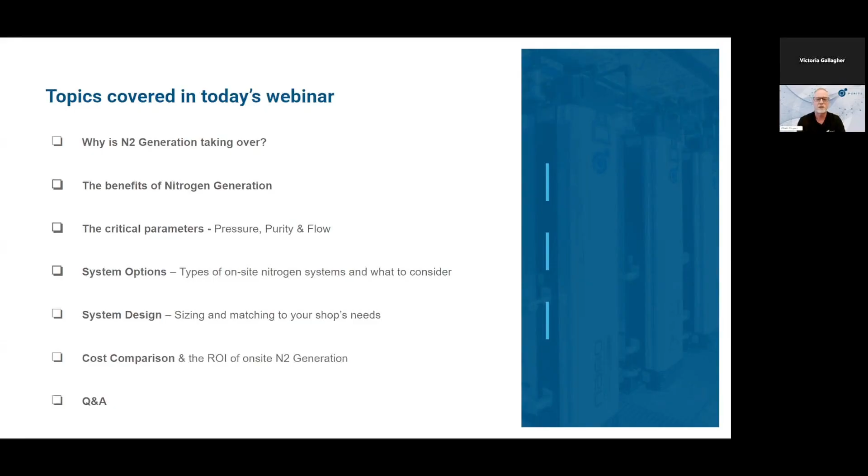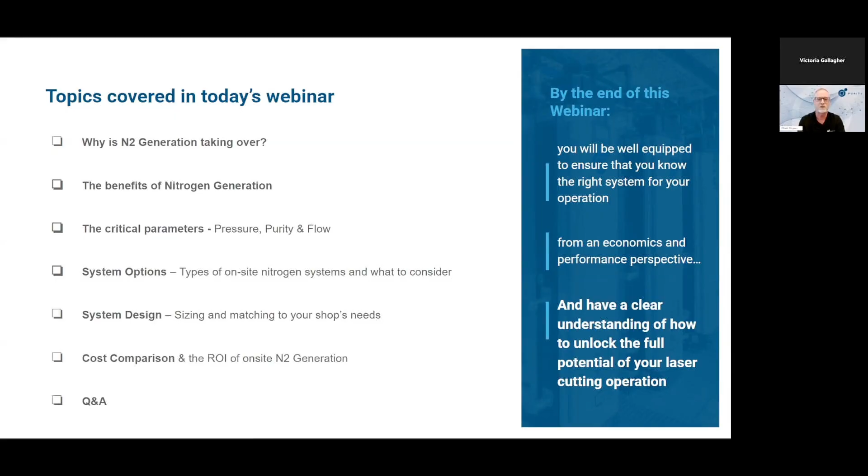And as Victoria mentioned, at the end there's going to be an opportunity for some Q&A. By the end of this webinar, you're going to be well equipped to ensure you know the right system for your operation, both from an economic and a performance perspective, and have that clear understanding of how to unlock the full potential of your operation with this technology.

Now, a couple quick points about Purity Gas, who we are, what makes us qualified to present this information in this webinar. First, our origin. Nitrogen generation serves the purpose of allowing users to reliably and safely produce their own nitrogen. Most importantly, it provides users with a far more affordable option than the typical delivered nitrogen options. Purity Gas was born as a result of seeing the nitrogen generation market being underserved, primarily by dealers and definitely not by experts. The market needed leadership in this regard, and hence Purity Gas was born.

The entire team here are nitrogen generation experts across all departments. And a little internal motto that we live by here is: nitrogen generation is all we do, so we better be the best at it.

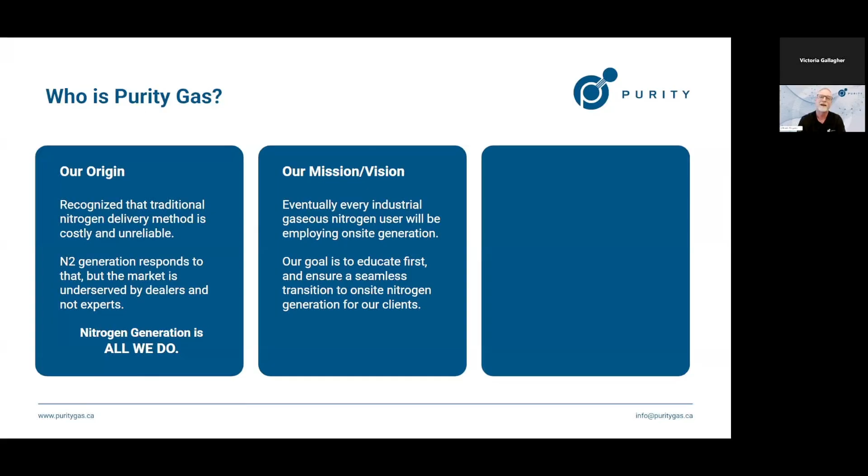Now, talking about our mission and our vision as a company, there is an expectation that eventually every industrial gaseous nitrogen user is going to be using on-site nitrogen generation technology. Our goal is to educate first and ensure a seamless transition for anyone looking to benefit from the technology, and hopefully you learn enough from us that you choose us as your partner.

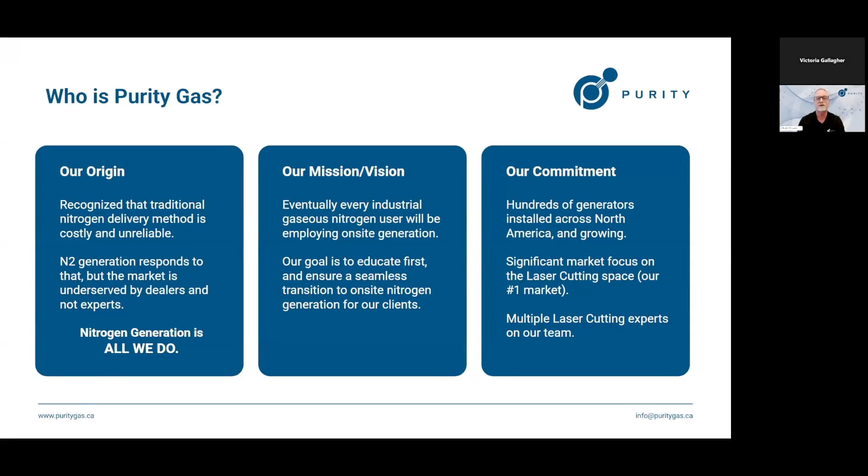Now, our demonstrated commitment to this industry: we have hundreds of nitrogen generators installed across North America, and that number obviously is constantly and very quickly growing. We have a pretty significant market focus on the laser cutting space. We've got several laser cutting experts on our team focused on this vertical, both from a customer experience perspective as well as R&D and engineering.

So the shift is underway, and the eventual shift is inevitable. We're going to look at why this is happening, and we've got three portions of the equation. The first, the changes we're seeing in the traditional delivery method of nitrogen: the cost is increasing, it's getting more expensive every year. The degree of reliability is decreasing, increasingly unreliable. And we're also seeing these contract lengths really start to expand to 5, 7, even 10-year lengths.

So we've got the one side with the traditional delivery, and benefits or improvements to on-site nitrogen generation, both in its availability, the efficiency, and the affordability of these. So more and more of this is coming available, and it's more viable in different and more operations.

Factor in now your specific business and the changes in metal fabrication. Everybody's running fiber lasers now. You've got more materials that are using nitrogen, and using more of it. You've got 12, 24, 30, I think there's even 60 kilowatt lasers out there now, and the nitrogen usage is obviously increasing as a result. All of that leading to that shift into on-site nitrogen generation, as I mentioned.

Now, when we talk about the benefits of on-site nitrogen generation, we break them into four pillars of value: expense reduction, operational improvements, environmental impact, and occupational health and safety.

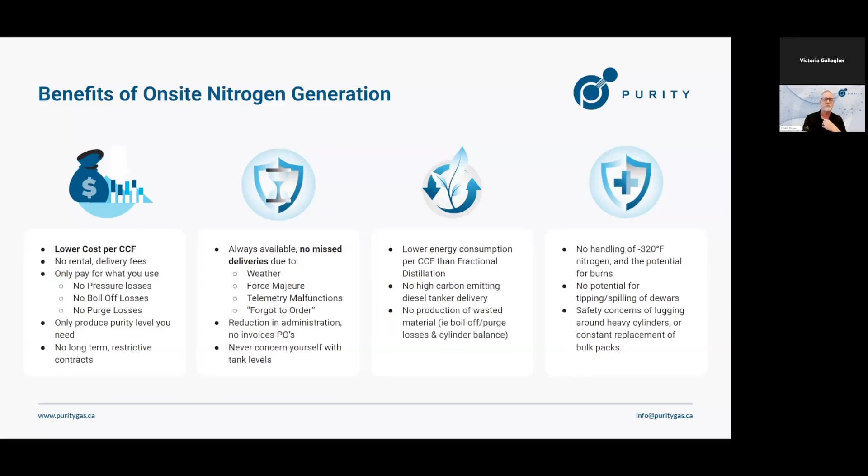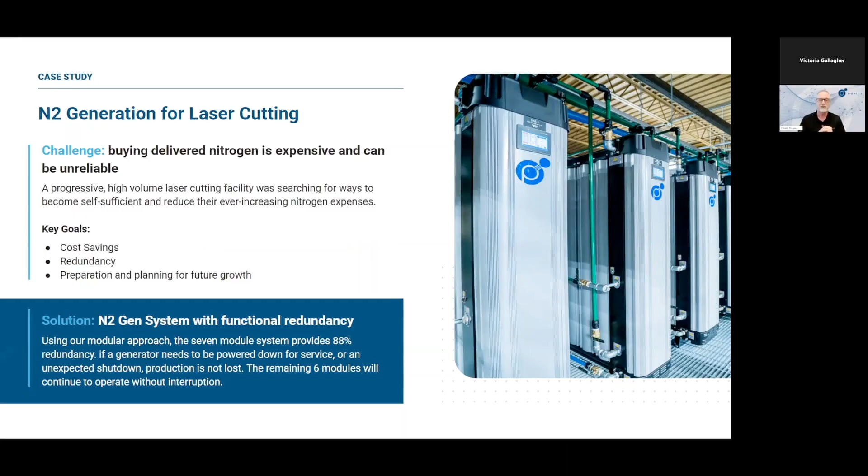Now, as far as some case studies, I wanted to share a couple from the two ends of the spectrum for laser cutting operations. This particular company was a large operator, still is, and they ended up getting a multi-bank system of 7 of our largest generators. They did that entire transition from liquid nitrogen and saved 69% on their annual nitrogen spend, turned into a 3.4-year payback, and they saved about 20 tons of CO2 emissions.

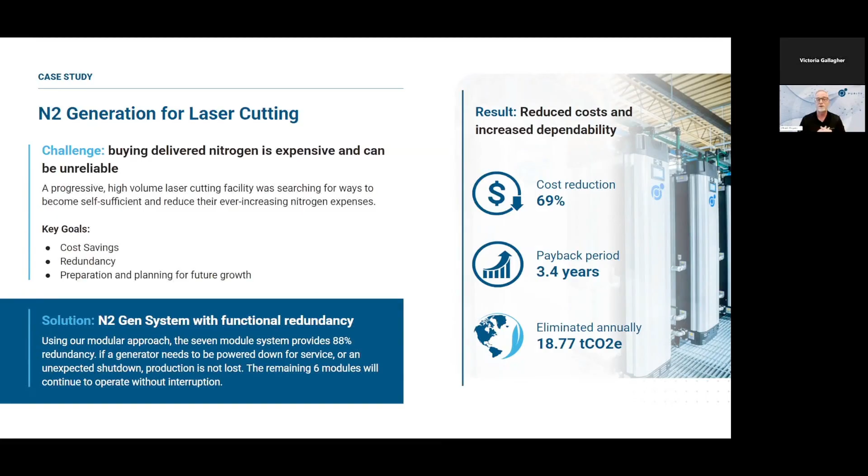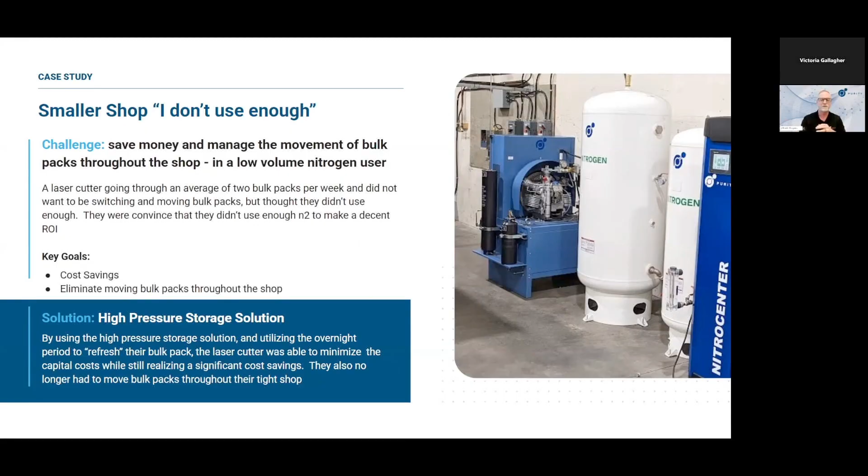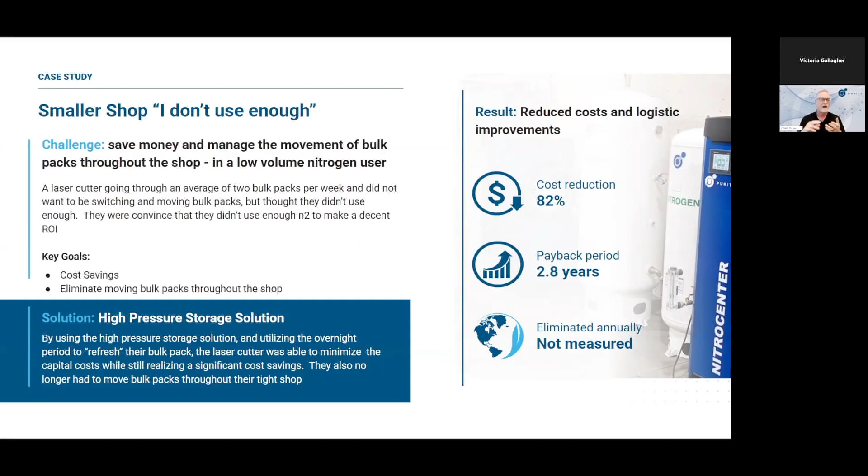On the other end of the spectrum, this is a smaller laser shop who, when we first started talking to them, said, 'I don't use enough.' They were using a couple of bulk packs a week. Through our free assessment process, we determined that with the cost they were spending on those 2 bulk packs, they were actually able to pay back a system in 2.8 years. So they recognized the savings, but also became a lot more efficient by not having to swap out bulk packs, manage deliveries, or move bulk packs through the shop.

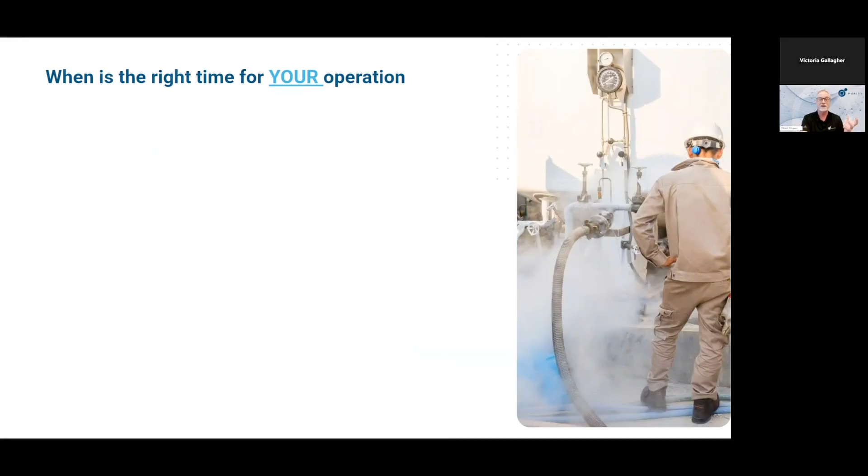So the question that's often asked is: when's the right time to actually make that switch? We can identify several of those. First, when you run out of nitrogen, you miss deliveries, or you're put on allocation or force majeure.

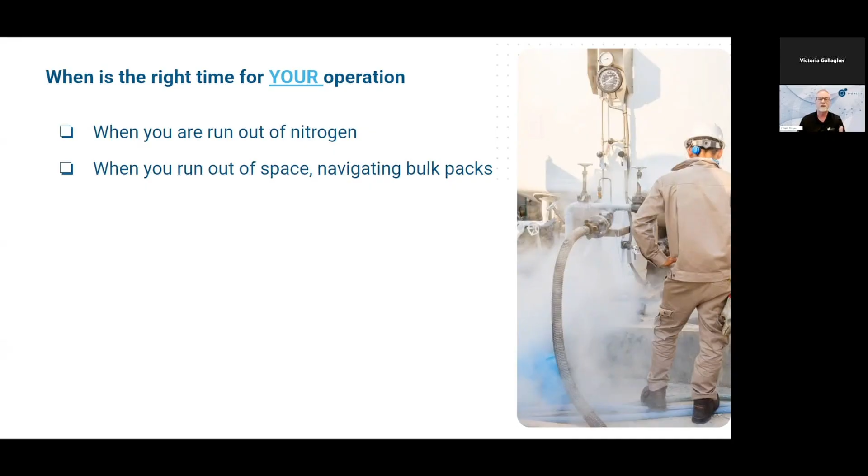Lasers are incredibly expensive, and therefore they have a very expensive downtime cost, charging out hundreds of dollars per hour. Not very beneficial to not be able to run your laser because your assist gas isn't available. When you run out of space, maybe you've got too many bulk packs on the floor. Keeping several on hand at any given time is valuable real estate and can also pose a health and safety issue.

When and if you want to positively impact the environment, as I mentioned before, increase the sustainability by way of eliminating the high CO2 emitting diesel tankers from that delivery process.

When your contract is up, or before you sign a contract, the ROI and payback are almost always shorter than the contract lengths being offered. We're seeing 5, 7, and 10+ year contracts becoming the norm. What's interesting is when we look at paybacks of 2.8 or 3 years, the strategy many of my customers employ is: as long as it's shorter than the contract length I have to sign up for, that's a good perspective.

When you use enough - well, how much is enough? Our customers have made great use of nitrogen generation systems with incredible paybacks, using as little as a bulk pack every couple of weeks. And of course, it scales - the more you use, the more you save.

When you realize you're spending more than you should or could be - you're all experiencing regular price increases in spite of contracts even, some often upwards of 10% over a single year. With on-site nitrogen generation, we're typically seeing between about a 70 and 90% reduction in nitrogen costs.

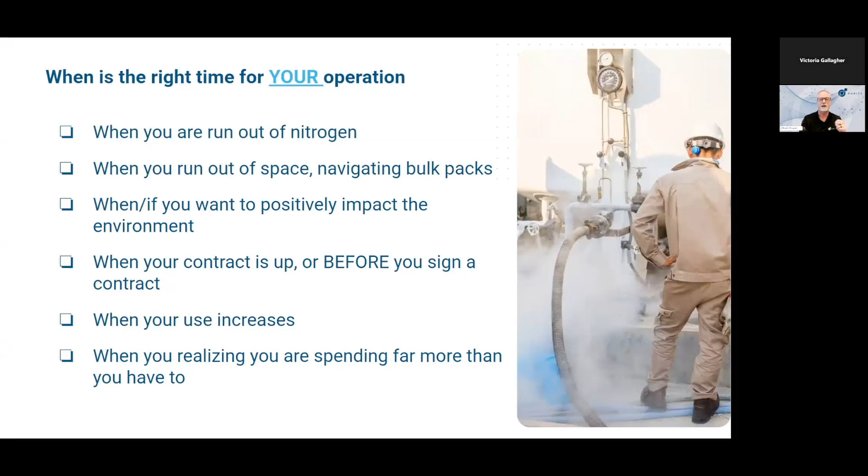So if you don't clearly understand your needs, you run one of two risks: speccing a system that's oversized, costing you more than it needs to from an initial cost, space, and efficiency perspective, or conversely, a system that's undersized, resulting in not having enough nitrogen to satisfy what you need for your operation. So what are the requirements specific to the operation?

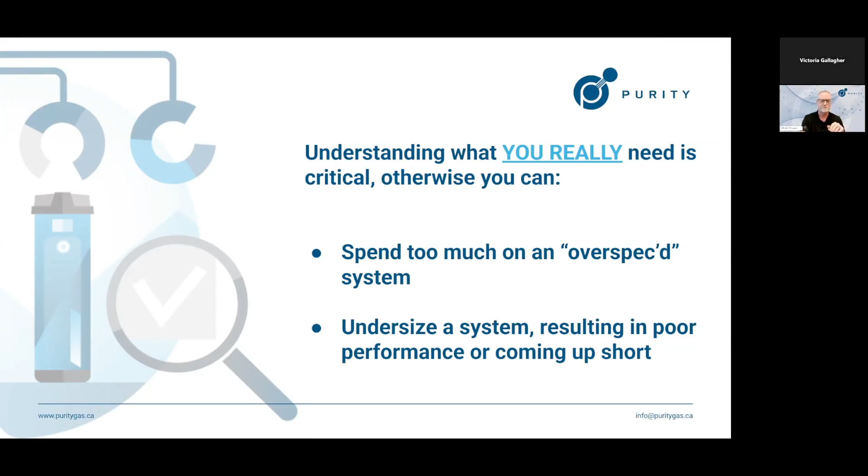We have several, but we're going to start with the big three. There are three main parameters when we're sizing a system. We talked about those, or highlighted what they were, but let's go into a little bit more detail.

First, it's pressure - more specifically, what the nitrogen outlet pressure your laser specifically requires. This is typically set by the laser or the laser manufacturer. In laser cutting, we see between 250 and 450 psi as the norm. With nitrogen generation, you have an opportunity to optimize your system by understanding that intimately, so as not to oversize or overpressurize a system unnecessarily. That can allow for the use of smaller and less expensive components and less energy consumption as well.

Pressure is not a one-size-fits-all specification, although in many cases it's portrayed that way. Knowing what your actual pressure requirement is going to be beneficial to your operation.

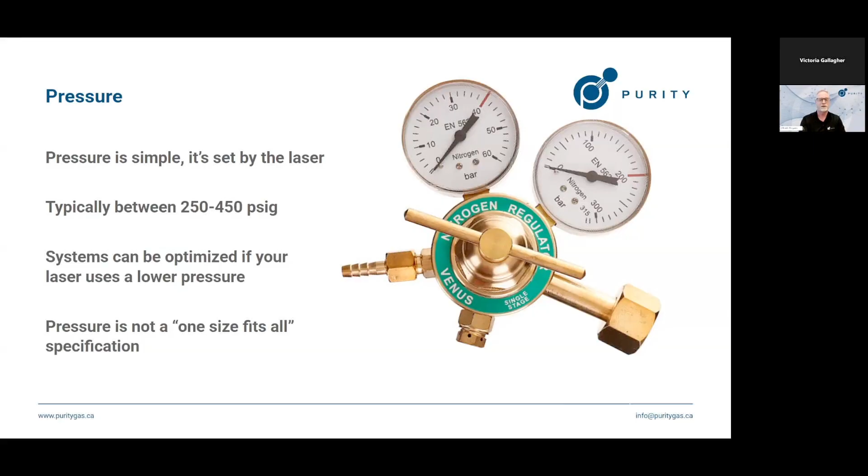Next is purity, and this is a source of quite a bit of confusion regularly. What purity means is actually the measure of allowable oxygen - it's not a measure of how clean the nitrogen is. Nitrogen generation is capable of producing nitrogen as clean, and in some cases cleaner, than bulk delivered nitrogen. As far as what your laser needs, oftentimes the laser manufacturer is going to spec that 5 nines, the 99.999% nitrogen. However, that spec's typically designed to, quote, cover their butts, and not necessarily a true reflection of what the needs are. As far as what the needs are, it's based on the materials you're cutting.

The market has experienced success with these established purities: minimum 95% for cutting aluminum, 99.5% for mild steel, and stainless, the most prone to oxidation, is 99.95%. Now, nitrogen generation is more than capable of producing the 5 nines, and we do it for other industries and verticals. However, it results in a larger than necessary, and subsequently more costly, system - both from a capital and operational cost perspective. So, concluding that, understanding the correct purity that's going to produce suitable cuts is critical, so that you can challenge the spec and know what your true requirements are.

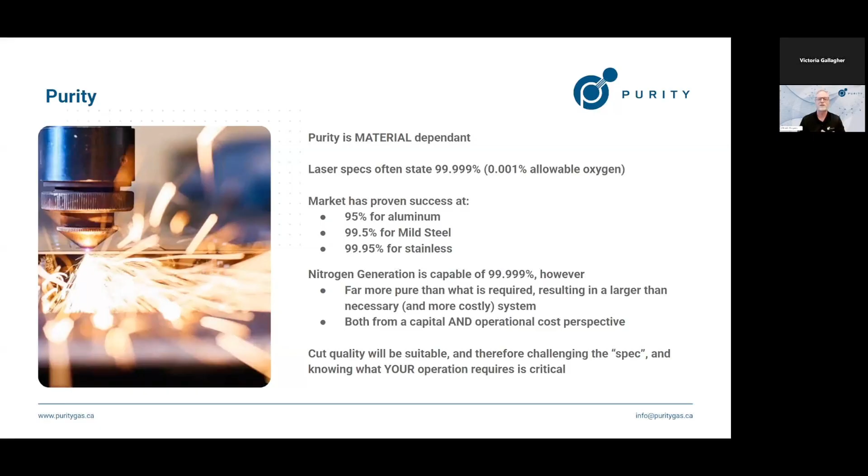Now, finally, flow. Flow is dictated by the material, the thickness that you cut, coupled with the nozzle size that you're using and the pressure specified by the laser manufacturer. Knowing what you cut - what material and what thickness - is going to ensure the optimal system design.

I say that because you might have a peak flow associated with 1 inch aluminum, but if all you ever cut is 1/4 inch, then there's no point in designing such a large, robust system for the 1 inch.

Flow is measured in how many cubic feet per hour of nitrogen you're going to use. One thing we caution people with is: do not get caught up in your average usage, be it daily or annual, because that doesn't tell the story at the hourly level. So peak usage is typically what we consider the critical specification to understand, except for some high pressure storage solutions, which I'm going to talk about later. But generally speaking, the peak hourly usage is what you're going to want to find out.

You're going to want to have a look at the laser manufacturer's documentation, and that'll determine the actual flow rates required. I've built something that looks like a typical gas consumption chart on the right side here.

Now, sometimes those aren't available. You can employ a nitrogen audit, which we can certainly help you with, but you can also count on a reputable partner like us to have a library of these gas consumption charts at our disposal, and we do keep a library of them.

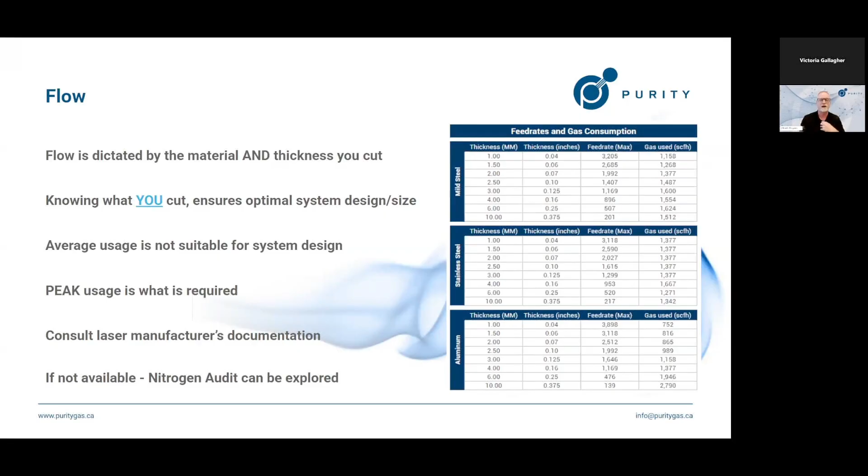We talked about the big three. Well, there's a fourth, and the fourth is specific to laser cutting. Laser cutting operations are different than the rest of gaseous nitrogen use cases, and that fourth parameter is your hours of operation.

Specific to laser cutting, identifying what your hours of operation are is going to help us determine the right design philosophy for your operation. That's the high pressure storage solution or mid-pressure on-demand. We'll talk about those in just a moment.

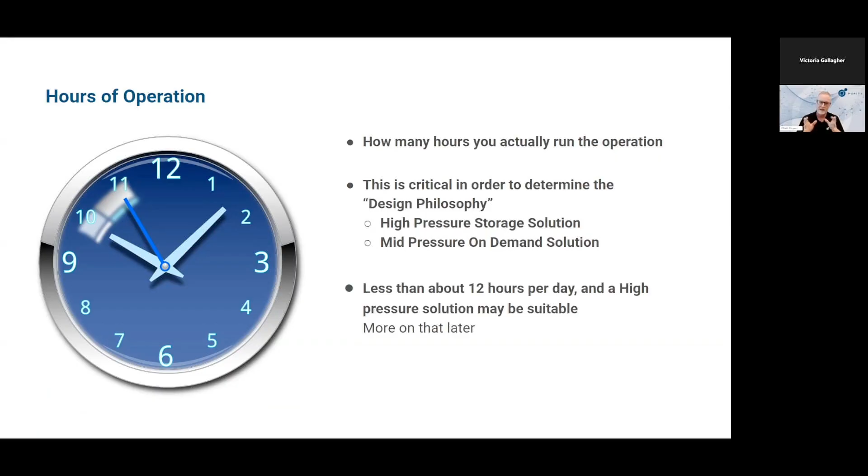Now understanding the technology best suited for your requirements, parameters are clear, you can use that information with some other inputs to determine which nitrogen generation technology is right for you. First, we have selective permeation, or membrane technology as it's commonly referred to.

Membrane generation has a lower purity threshold, so looking back at our purity requirements, you may be limited on some of the materials that you can cut. Membrane does come with a lower capital and maintenance cost, but consequently you lose something in efficiency, which means you'll require a larger amount of feed air, aka compressor size, and therefore more electricity used as a result of that increased air requirement.

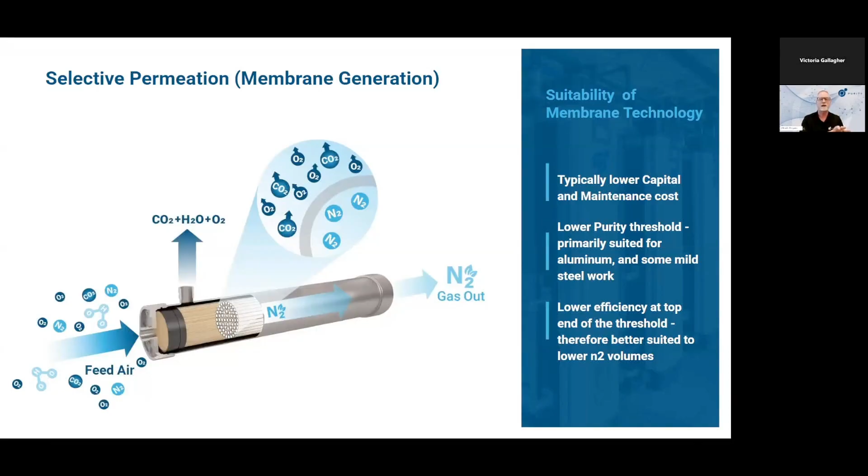But it can serve a purpose. Should your specific operation tolerate the lower purities, then it might be a fit. Typically membrane is more suitable for lower volume nitrogen users.

The other technology is pressure swing adsorption technology, or PSA, and this is what has the top end purity requirements covered, particularly when talking about laser cutting. We can produce purities that are rivaling or even surpassing that of delivered nitrogen.

Also, some other benefits that come in the box: there's an integrated oxygen analyzer. They employ fail safes, so should you have a purity critical application, it's always measuring that purity level, and should there be a problem such as a dip in purity, it'll manage that.

Also talking lifespan, with proper maintenance you can expect a much longer lifespan for PSA versus the membrane or selective permeation technology. These PSA systems provide the lowest air to nitrogen ratio, meaning the least amount of air required to produce the same amount of nitrogen. So subsequently, less energy, greater efficiency.

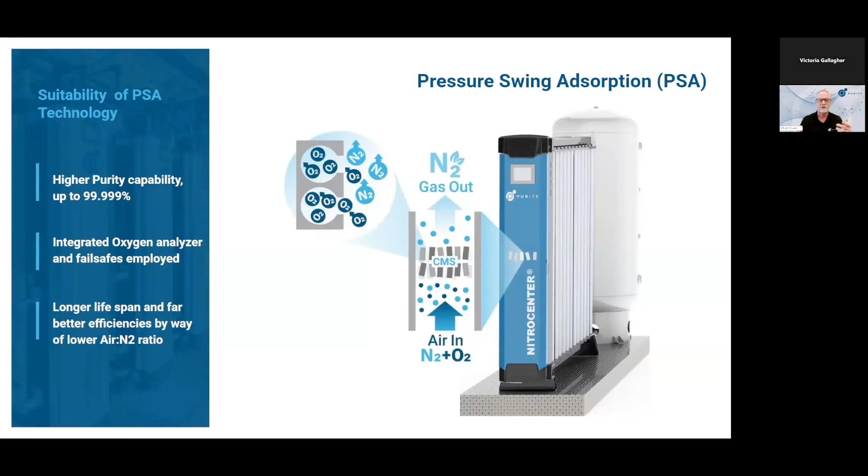Now those are the two technologies. We've got the two design philosophies that I've touched on a couple of times, and the first is high pressure storage.

High pressure storage solutions generate at a rate less than the actual peak demand, but they supplement those needs with stored nitrogen. These are typically suited for lower volume users, and the big key point is back to the hours of operation, running up to 12 or 16 hours per day. The reason we do that is the downtime at night, coupled with some downtime during the day, is when we're going to top up those storage vessels, so that every morning you come into a full complement of nitrogen that can be supplemented during the day.

These are made up of smaller components, which reduces the capital cost of the system. That's why you would select this type of design philosophy.

Now in terms of sizing, in this case we talked about peak hourly. Here it would be the peak daily usage because you're going to start with a volume, and as long as we have a good understanding of what your heaviest day of use is, we designed around that.

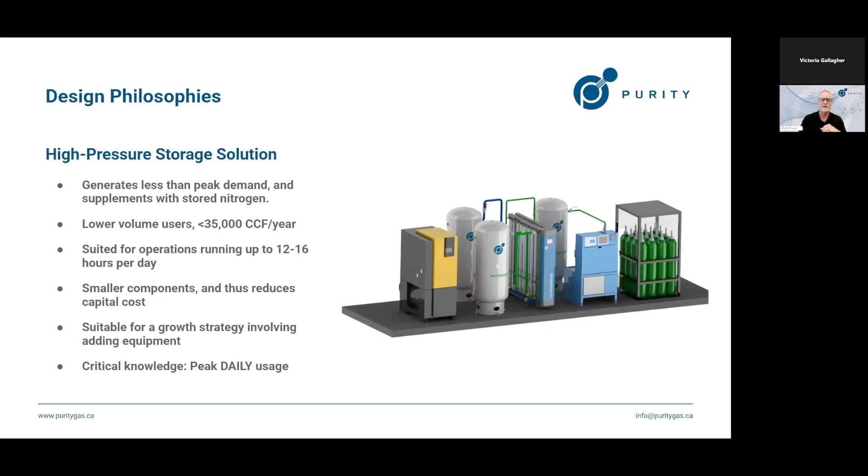The other design philosophy is what we call mid-pressure on-demand solutions. These are based on the peak hourly demand of your operation, so whenever you need that peak flow, the system is capable of generating it. Comparing these two to something in everybody's home, a water heater, you either have your tank water heater or your tankless. This is the tankless version.

Contrasting the high pressure storage solution, mid-pressure on-demand is often more suitable for higher volume users, and these are what you have to have if you are running in the 16 plus hours per day operation. But having said that, these are also still good for smaller users as well.

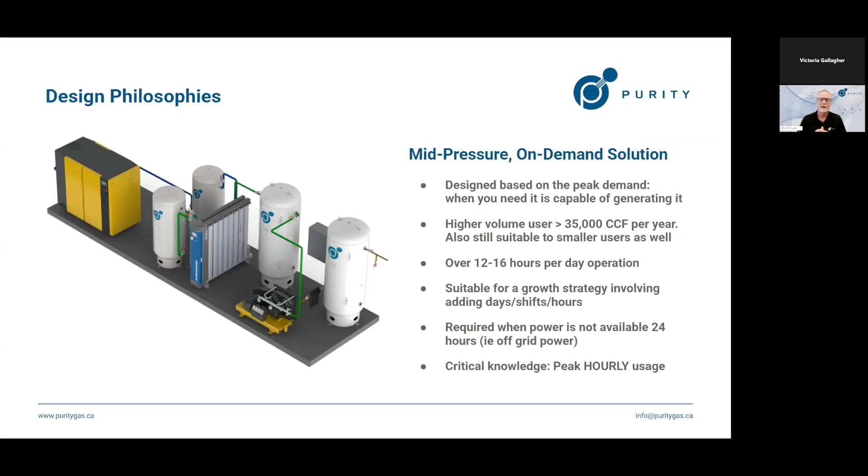So that's the design technologies and philosophies. Now, future proofing: talking about proper planning for the present and the future.

Understand how you plan to grow your business. There are several different ways that you can increase production. The nitrogen generation system that you select or employ should suit that.

Talking about adding equipment or lasers: if you're only running 8 to 16 hours a day, this growth strategy really suits the high pressure systems best. If you have a high pressure storage system, you can just add more storage and have more supplemental supply. It still takes advantage of downtime and the lower-than-peak days, evenings, and weekends, and you can continue to add, starting on a Monday morning.

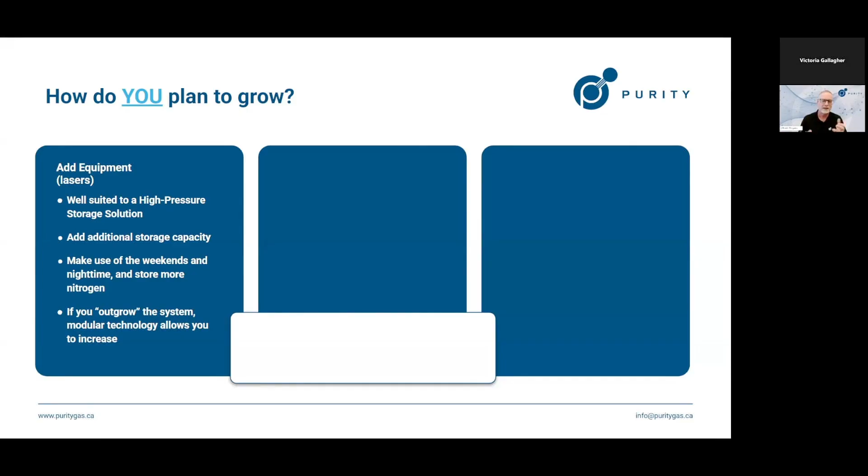It's all modular, so we can add on to it at a later date as well. Another growth strategy is to upgrade to higher powered lasers—same approach as adding lasers, but the increase of nitrogen typically isn't quite as drastic.

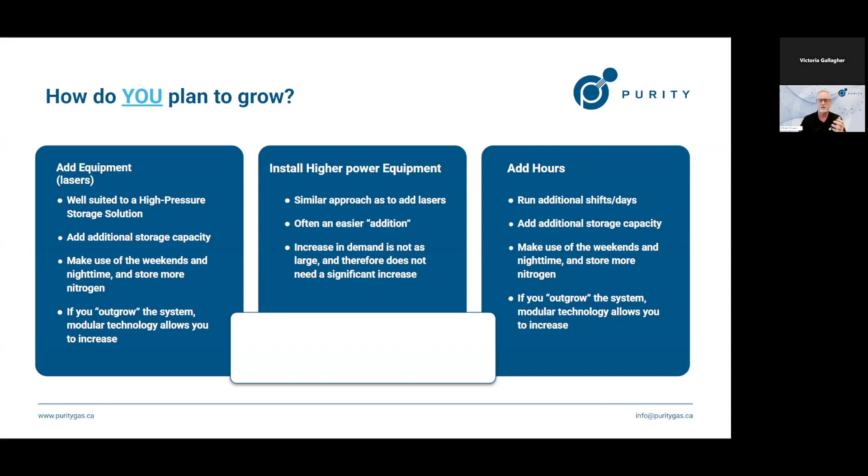Now, adding hours: if you have your generator or your lasers running 8 hours a day, take them up to 16, take them up to 24. Using an on-demand solution means it's on demand, so there's no need to increase any system design—the generator just simply runs more. The components in all of our systems are rated for 100% duty cycle, so they can run nonstop 24/7. So talking growth strategy, adding hours to your operation is suited to the on-demand solution.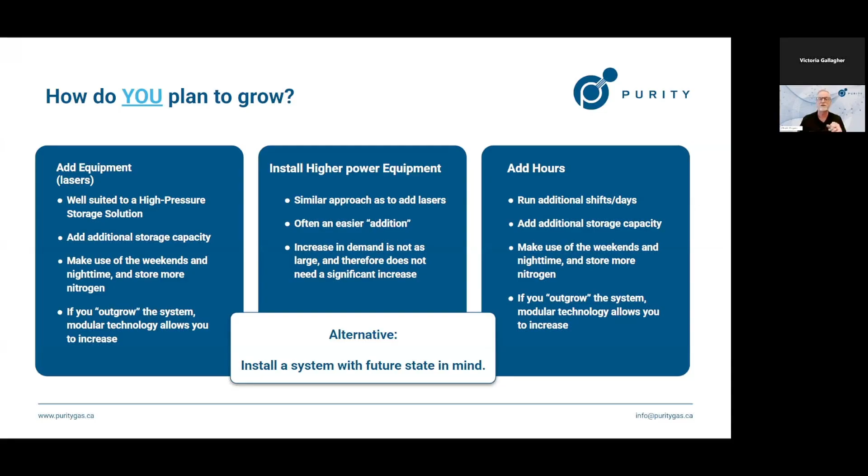Now, if you don't know your future plans, either solution is expandable, so you're still covered that way. But if you do know or have a good sense of what your future plans are, there are ways to accommodate growth with an initial system design.

You design it part way there—you can add on to it, maintaining the ideal base design for the future state. And while you're future proofing, you likely end up providing yourself with some bonus redundancy. That can be accomplished by reducing individual component sizes and increasing the number of them, ultimately providing 50% or more redundancy on all or some of those components, which can help with preventative maintenance time and that sort of thing.

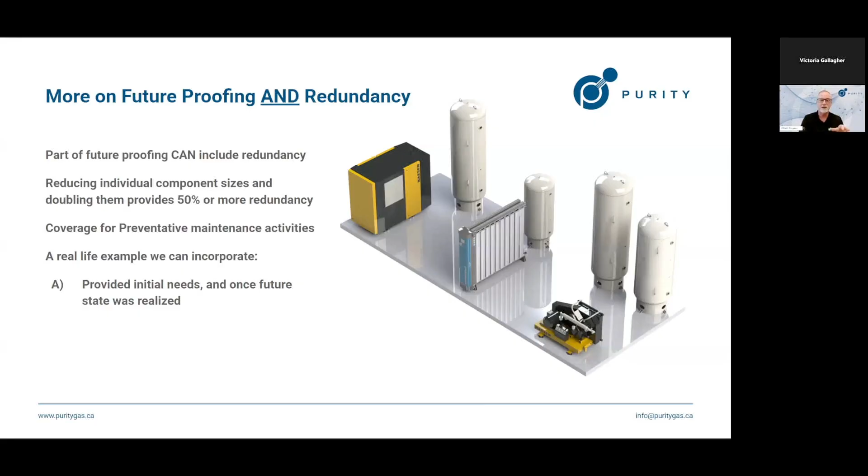As a real life example on screen here, we provided this customer a system capable of their initial, current daily needs. Once their future state was realized, they added lasers, and we plopped in another compressor and another nitrogen generator. So we not only gave them redundancy, we increased their system size.

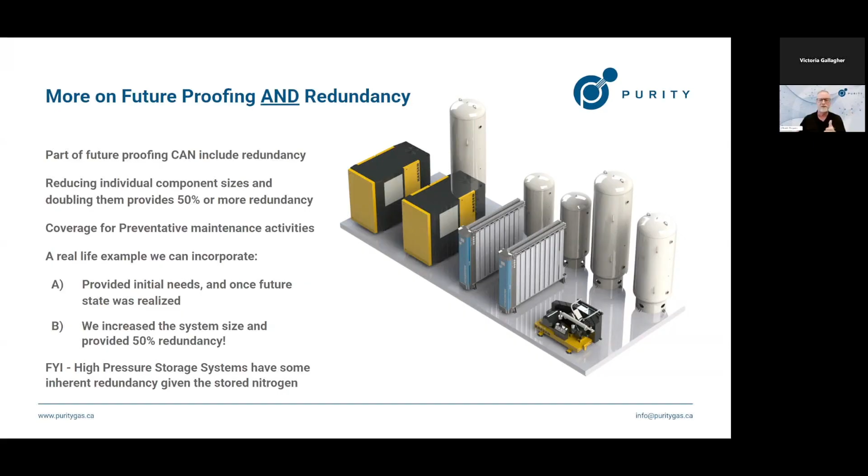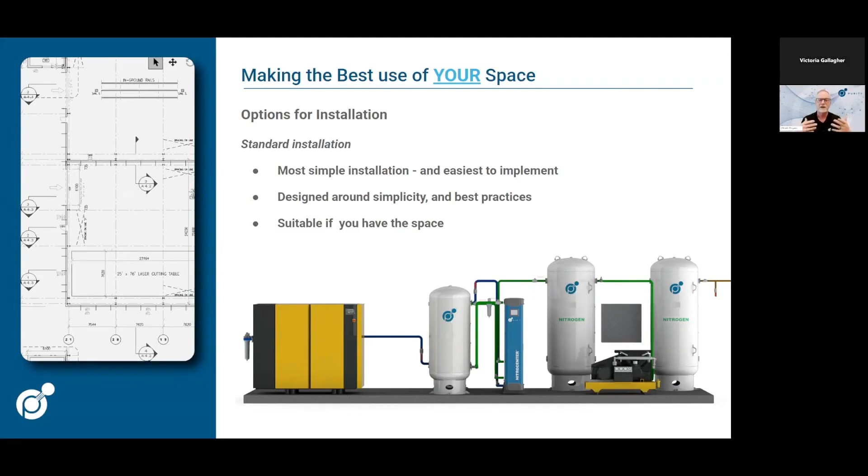Now, most metal fab shops that I've been into like to use their space for production. Given the sheer size of what you need for material handling and storage, how do you optimize your solution for your space? The first option is standard installation—of course it's the easiest, and if you've got the space, the best choice. It's the most simple installation, laid out based on best practices by our engineering team, with simplicity while still making the best use of your space.

Another option: we can incorporate a mezzanine. We often see these mezzanines used in laser cutting operations, holding the power supplies of the lasers. This frees up valuable floor space, makes use of the dead space up there, and you don't have to pay property taxes on it. It allows production areas to remain as production areas, and building a mezzanine is probably something you know somebody who can do—namely yourselves.

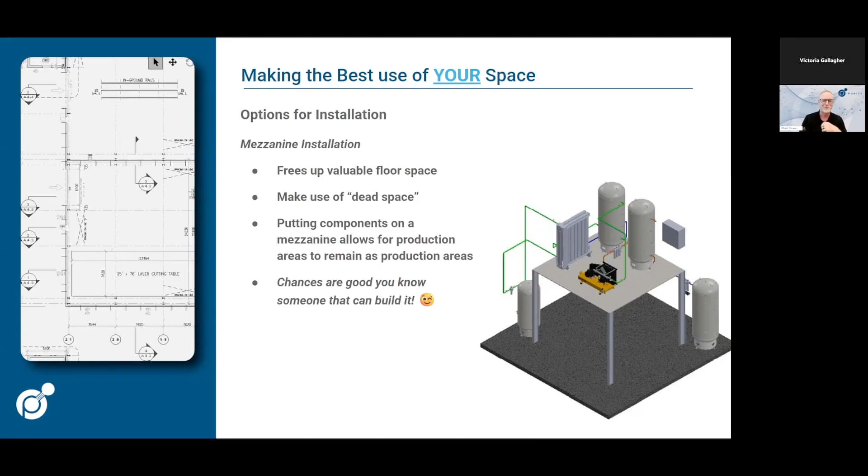Alternatively, you can keep your system outside. Having said that, the components do need to be protected from the elements in a climate-controlled environment, which dictates between 40 and 100 degrees Fahrenheit, adequate air exchanges, and space inside to do maintenance activities, etc. You can incorporate an enclosure and place this unit outside, but the engineering has to take into account climate control factors. This example on screen looks like it maybe was a sea can one day—and it was—but a lot of customization happens to these in order to make them suitable.

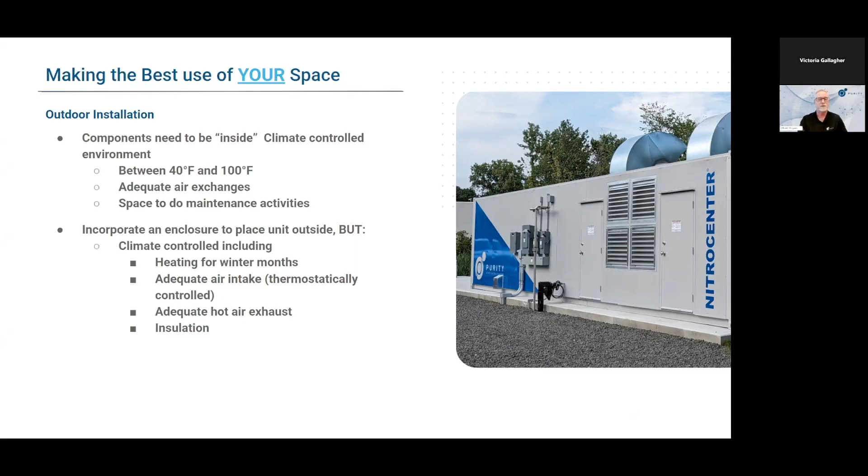Heating in the winter, cooling for the summer, adequate air intake, ideally thermostatically controlled, adequate hot air exhaust, because these compressors do generate quite a bit of heat, and of course, insulation. Now, an enclosure means the system becomes turnkey. You just drop it in place, connect the power and the nitrogen outlet. They've got to be properly engineered for the application, and they do, in many cases, start their life as a sea can, but they're a whole lot more than that by the time they're suitable to become a nitrogen generation outbuilding. Really good alternative. We're seeing significant growth in the number of turnkey systems we're putting in the field, at an exponential rate, I would say.

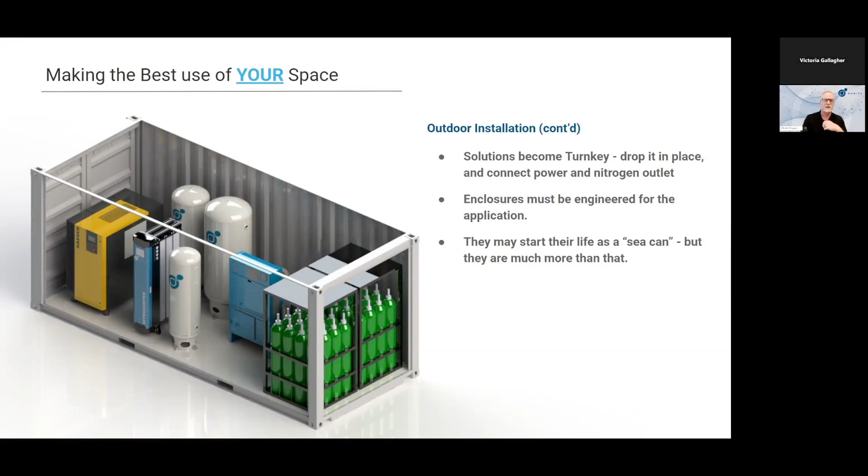Now, what many of you wanted to come here for is to talk about the cost, the price versus value equation. So what are the operating costs? Operating costs include two inputs, electricity and maintenance, and that's it.

To use an example from one of the case studies I highlighted earlier, this particular customer, a small user, was running 7,700 CCF per year in nitrogen. Smaller user, but these cases scale pretty linearly. Their operating costs to generate the nitrogen they were using in a year was $1,300 in electricity and $10,000 a year in maintenance. That's it, that's all the input costs. So nitrogen was costing them $65,000 a year to buy. We reduced it to about $11,000.

Again, I think I've said it 3 times because it's very important: there are no other operational costs. When we provide our free assessment, ROI payback, and feasibility study to our customers, we're going to state the total amount of electricity and maintenance per unit of nitrogen when we provide the cost to generate. This is not a number in addition to maintenance and electricity, consider that all in. So in this case, their cost to buy nitrogen was $8.42 per CCF, $1.47 to make it, so an 82% savings.

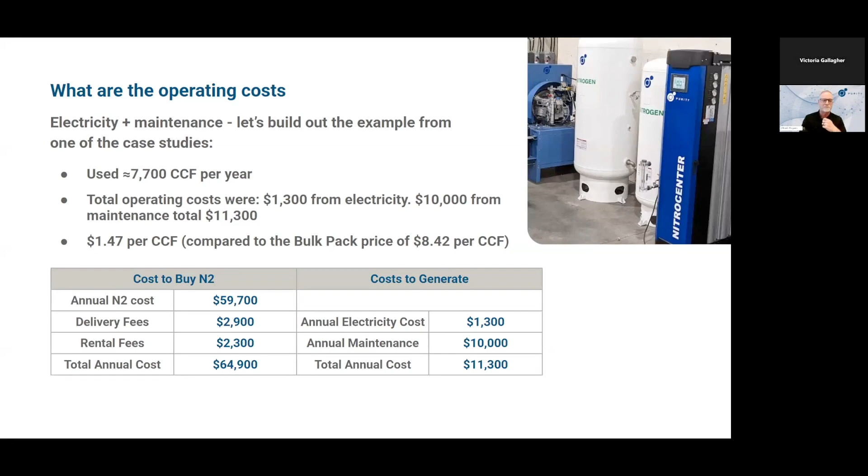We've talked about operational costs. Now onto the capital. Capital cost is of course important, but how it can impact your cash flow should be of greater concern. Look at it as though you're moving where you spend your money and saving it while you're doing so.

From that same case study, they were spending $65,000 a year. When they factored the capital cost of going to on-site nitrogen generation, their total cost was $53,000 during the finance term. They financed it, and their finance payment, electricity cost, and maintenance came to $53,000 during the finance period. So instead of handing $65,000 over to one supplier, they saved over $12,000 by putting some to the power utility, some to the annual maintenance kitty, and some to the lender. After that finance term, their annual savings became $53,000.

So effectively what you're doing is making that payback period immediate, because month one is costing you less, including that capital repayment cost. In this case, they were saving $1,000 a month, so $1,000 more cash every month for the first 5 years, and then almost $4,500 a month after that. So it makes incredible financial sense in either the capital purchase model or the lease to own model as well. Good to know.

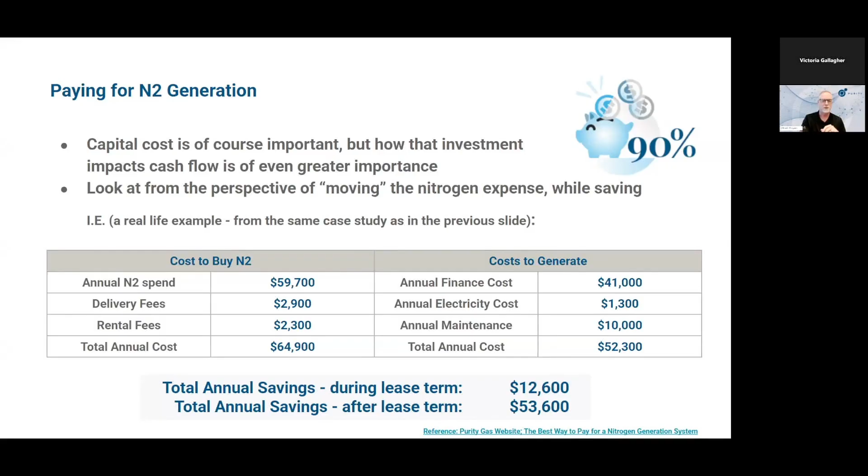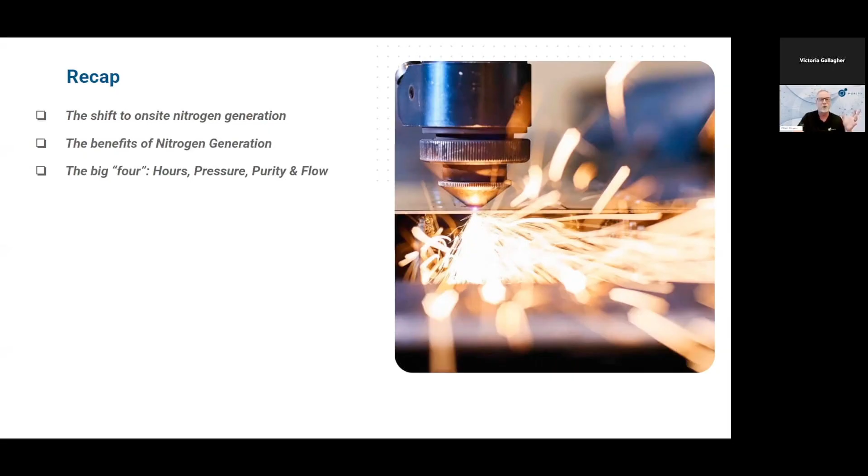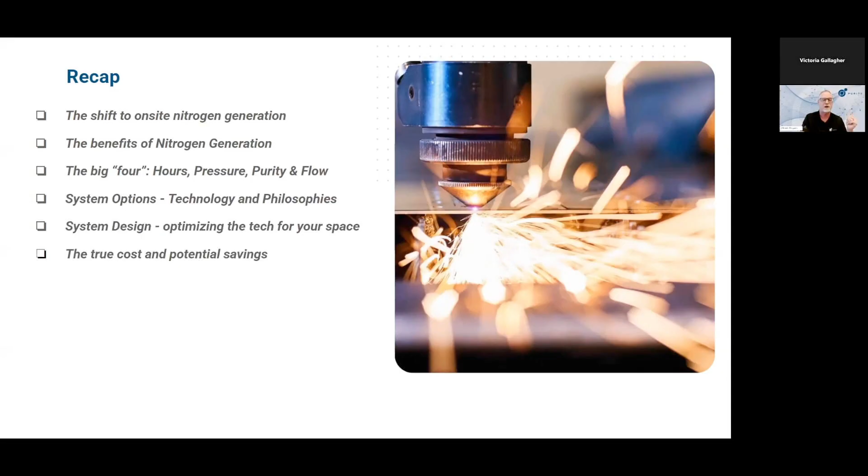So we've gone through quite a bit of information, as my throat is alluding to with the scratchiness. To summarize what we went through and what you need to know: understanding the shift, understanding the benefits of nitrogen generation, the system options you've got, technologies and philosophies, and then the true costs, optimizing for your space and the true costs. With that, I want to thank everybody for their time. I really hope you saw some value in this information.